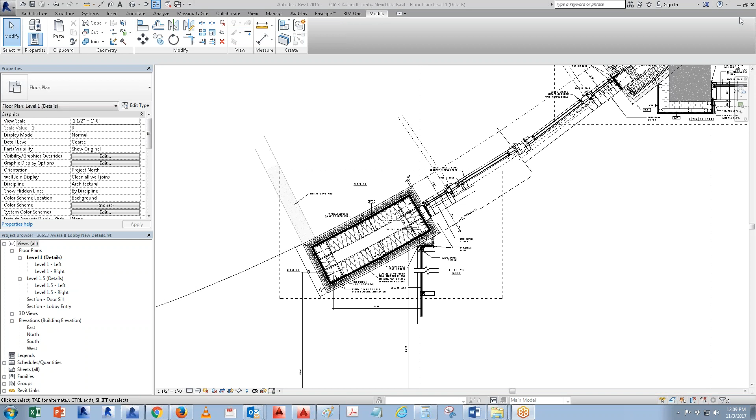Welcome to IBI. Today I'm going to basically talk about the questions you guys have. It's going to be like a live demo where you guys can ask me anything, and I'll try to answer as much as I can. You guys have already gone through the video, right, about how to set up all that stuff? Is there anything you guys have a question with before we start? Nothing? Okay, that's fine.

I'm just going to talk about some stuff, so lunch and learn training. If you guys want access to all the lunch and learn sessions from the past, you can go into the iDrive, and there's one called the CAD, and under there's a lot of lunch and learn and training. A lot of the stuff I've done over like 11 years, I just punch them in there, and you can get all the videos. I do post some of the videos online too. If you want the YouTube videos, just look up my name and you can find it.

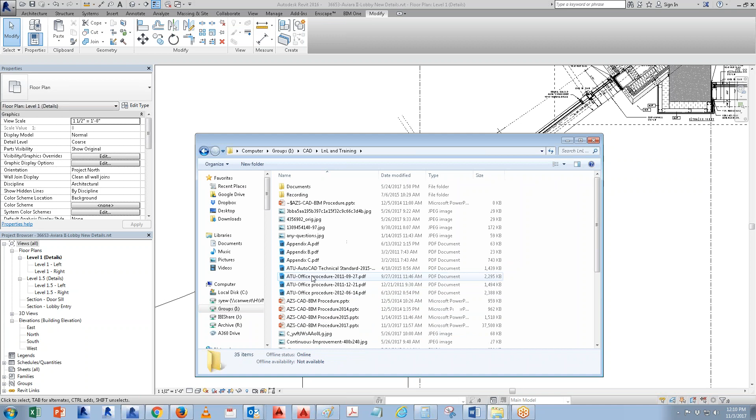So today I'm just going to be going into the office procedure, okay? It should be under this PowerPoint presentation. Welcome to IBI, okay?

Now, if you cannot find those people, there's always that CAD help information you can throw questions up to. But for licensing, let's say if you cannot get an AutoCAD license, those guys are the support. Do not go to IT because all of it deals from this CAD help, because CAD help deals with all licensing, including if you want V-Ray for SketchUp or some specific license for a specific product. Those are the go-to people, okay?

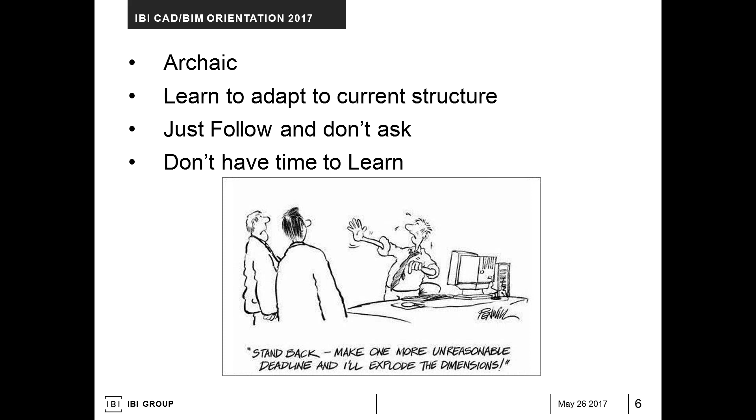Like what happens is sometimes we did a Revit project, and then the upper management says, oh just do it in CAD, finish it, right? And then what happens is the trickle down becomes a much more brutal sequence, because people miss out on the opportunity to teach the upper management about why we should keep this within the Revit side.

The other thing is that the market is adapting, it's changing very rapidly, and how would you adapt? I've met with a lot of offices for the past couple of years, and a lot of them are saying we're changing - Revit is becoming more and more adaptable, and they have to work within that kind of realm.

So when users say I want to basically just do it in CAD because that's what I'm used to, don't think about now - think about the future, 10 years down the road. Some project managers, I feel sorry for them, because I've been telling them they should be getting into Revit, and now they've been put on a job for 4 years and haven't learned any Revit. Later on, when you have new projects, they're going to be getting a Revit project, and how are they going to deal with this? They don't know.

This is why I said adapt to technology. Don't be shy about not learning it, because it's going to be coming down the pipe. You're going to have a lot of projects that's going to be Revit. It's going to be sometimes a bit CAD, but most of the time it's going to be just Revit, so how are you going to be dealing with that?

I just have a quick question. Sure.

So far it's been like Revit is easy to work with once the design is frozen and you're in kind of like a working drawing stage. But it's a bit too chunky and less flexible at a design stage, and we're facing that issue with one of the projects.

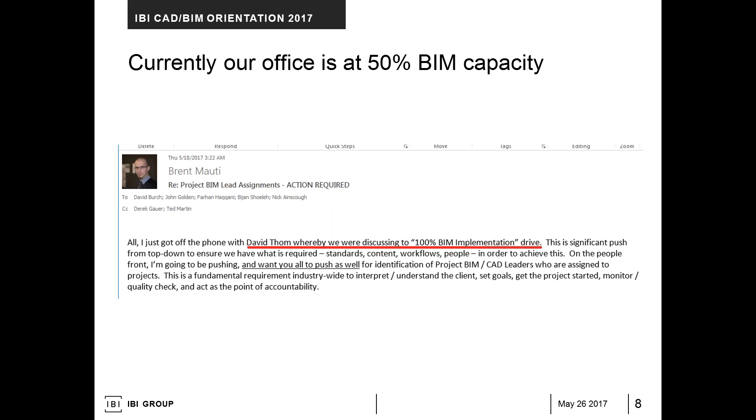Most users, this has always come up, right? They always hate uncertainties, okay? The thing is that if they don't like uncertainties, it's like, why bother pursuing it? But the thing is, I always give that attitude that if you don't try, you're not going to learn, because you can get stuck doing the CAD job over and over and over again.

But the costs keep going up and up and up, and then we have to pay the user more. But our fee to the client always reduces down to almost bare to nothing. So how do you adapt to that, right? As the user cost goes up and fees go down, you kind of have to find that balance.

So this is why a lot of the Revit projects have a benefit, because you're using fewer people, but at the same time, you're training them more to become, let's just say, a builder, right? You know how in the past, in architecture, they always say that the architects are the builders, structural engineer, mechanical, and electrical, or whatever, right?

Wrapped in one. So what Revit is actually doing is going back to that kind of scenario where you are an architect, you are a structural engineer, you are electrical, mechanical, and you're a contractor, all wrapped in one. So the possibility is endless, just depending on how much you want to learn, okay?

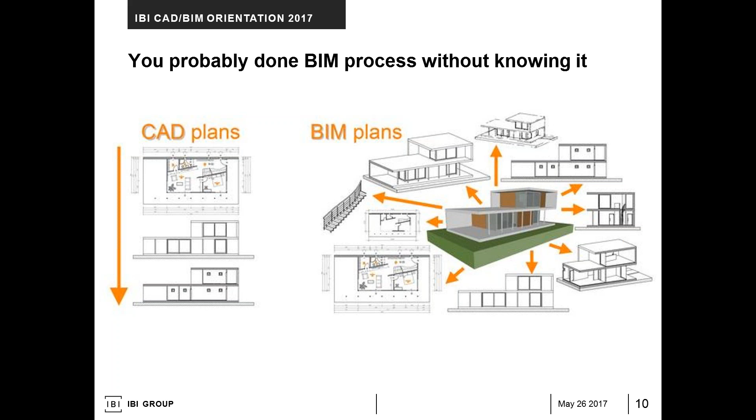Still, a lot of the time when we're doing SketchUp, we're just basically redrawing stuff. Whereas with BIM, if you have a central server hosted either by the city or whoever, like Google, then you could potentially pull that Revit data or whatever data it is and put it on your plan, and you don't have to do anything. That's kind of like the idea, right? Everybody just has this Revit thing, and then, how did this resource get pulled together?

The other thing I always find very fascinating in our office is that everybody works with so many multiple platforms. You go through the process where in a submission, you use so many different programs, and at the end of the day, when you do updating, it's like, where do I go? The thing is that we want to encourage people to simplify their workflow. Just don't think about, oh, I have to do this, I have to do this - just simplify it, make way.

Sometimes, like right now, I don't see the necessity of using SketchUp because I'm very proficient in Revit. So it becomes kind of like a tool, how to use it. Sometimes I use SketchUp because I have to take that SketchUp model and give it to a consultant who wants to use it. So how do you take the Revit data, which is massive, and downgrade it down to SketchUp level? Those are potential workarounds. So don't trash SketchUp out of your workflow, but use it as a way to enhance capability and potentially as a learning tool.

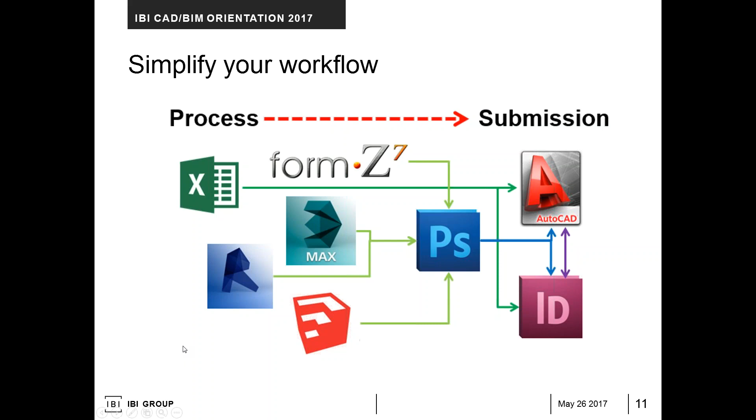Because one thing, everybody has expertise in different programs, but one thing we don't have is that we don't know who's good at what, and they don't teach people, so everybody just does their own thing. We never capture a lot of this user experience, and they don't teach other people, oh, this is how I do it, how I overcome it - everybody just does their own thing. So we want to capture that, but for now, we just say simplify your workflow.

So what I mean by simplify workflow is that if you're using Revit from start to finish, all you have is just one flow, and then this is basically a sub-program that's supporting your Revit side of things. Your data will always update, so basically this is your primary data, and the rest is just supplementary.

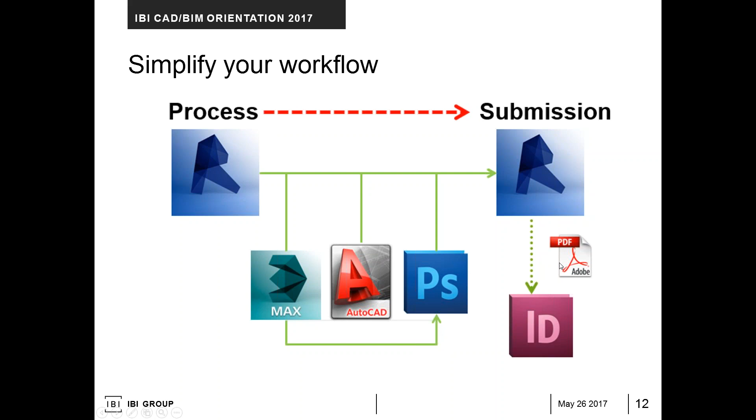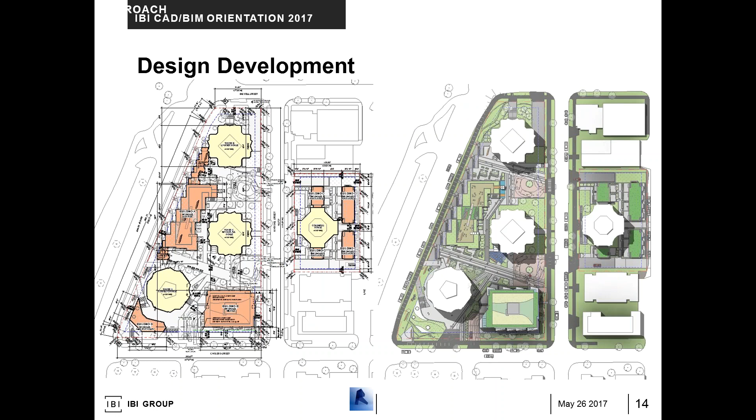All right, now here's some of the projects that we can do. This is design development, all done in Revit, no special tools. Again, this is kind of like Revit - you can design a lot of stuff, just given the context of what you want.

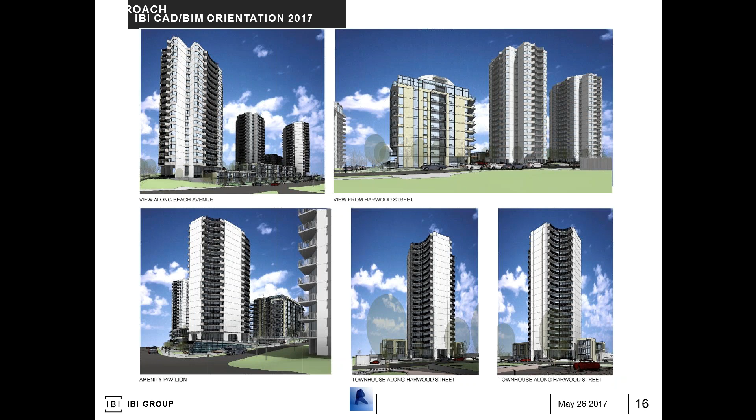Also ask the right question, ask the right people, because that's one thing we always miss in our office - people just trust somebody that doesn't know what they're doing. That's always the case. If you ask the right people, then you can produce your project on a timely manner, on budget, and it will not kill your overall project, and then you have to convert back to CAD. So some of the samples I just illustrated - this one, again, is done in Revit, and there's no other software I'm using.

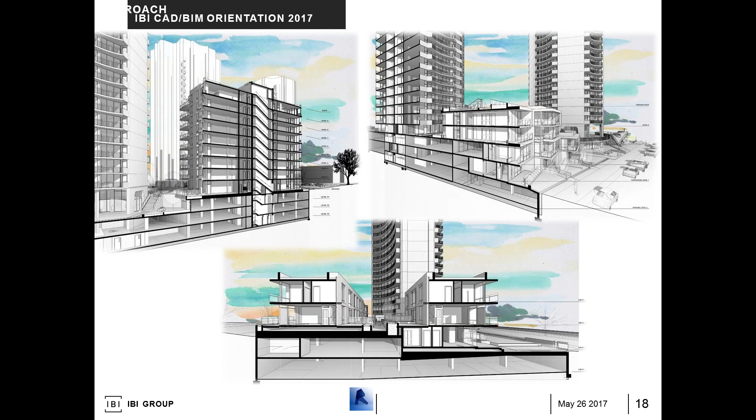What I did in this particular case is I basically slapped a hand-drawn, like watercolor background behind the Revit background. It looks kind of nice, and you can see the level of detail achievable, even for a section. So it's very presentation oriented. It is achievable, it's just a question of whether the user wants to go to that level.

You can also take that and use it for rendering in 3ds Max with V-Ray, and some offices use Enscape. If you don't know what Enscape does, it basically pulls the Revit model and lets you do real-time rendering at the same time, saving a snapshot so you don't have to go to a separate 3D model. All the materials and everything are set in Revit, then pushed to Enscape, and it does the rendering.

Question: do you have a different setup for Revit for conceptual design as opposed to working drawings? We do, but I have to train people on how to use it, because the major issue in our office is that everybody has a different background. They may not have all the expertise from the working drawings side.

I've seen a lot of projects where people copy the working drawing stuff and put it into conceptual design, or vice versa, and it just fails. They need constant mentoring, just teaching them how to do it, like this is the conceptual approach and how I would approach it, et cetera.

That was my question. And when I said our office in Edmonton, they're treating it like a separate project altogether, managing everything themselves. But so far it's part of our collaboration, so our Vancouver office is collaborating with the Edmonton office.

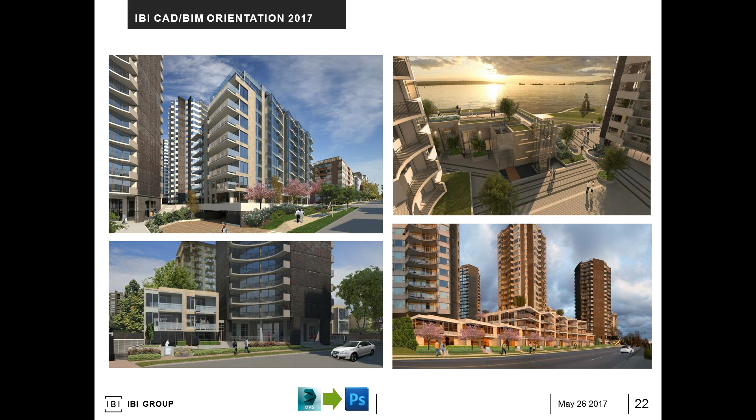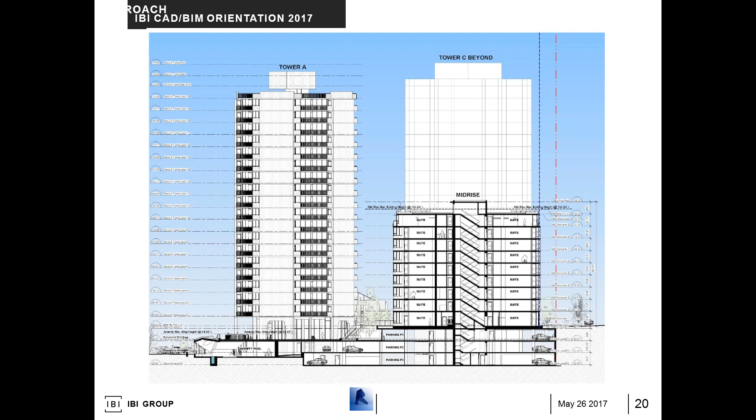Like this project I'm working on right now is actually a DP, and we treat it as a DP and then it goes into working drawings. It's a huge advantage because you just develop the same model and build more on it for working drawings, right? It is a big advantage, everyone agrees.

But so far has our office used it in such a way for any project like that? Well, in every office I've been in, it's a constant battle. It's like, when do you bring in Revit? Yeah, and in some offices, even a previous office, we did the conceptual design in Revit, but the working drawing team, the technical drawing team, threw that model out the window.

They prefer to build it in their own way, and it defeats the purpose of having Revit.

This is why it all comes down to, some people like to become a designer and they do not learn the working drawing side of things. For me, I like to do everything, because this is how you learn to become the master builder. If you're not going to learn the whole process, you're not going to understand how things are put together.

That's where I find there are a lot of challenges in our office, some people are willing to learn, some people are not willing to learn. We have a mixed bag of everybody, right? So at the same time, I want to be receptive and try to educate them as much as I can, because you may have experience that they may not have.

At the same time, just mentor them, because that's one thing I always find people just don't do anymore. It was like a master-apprentice relationship in the past, where you take on an apprentice and teach them how carpentry used to be done, passing down that knowledge so they can pass it to the next person. With Revit, we have to treat it the same way.

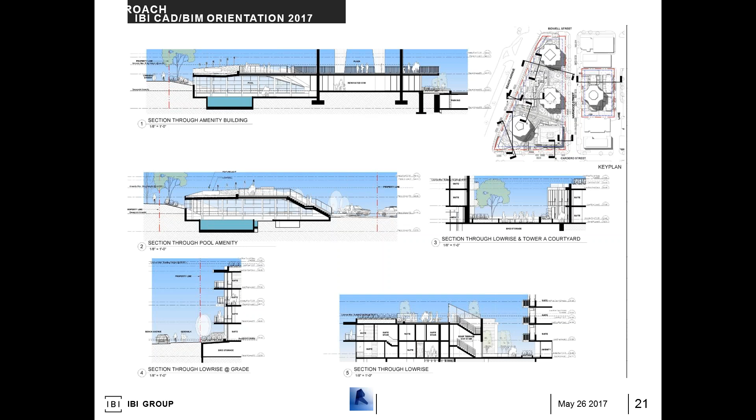They don't know everything, but they're put into a role where they have to do everything, and it becomes a telltale sign. I've written lists and given them to the managers saying, you guys have to be more upfront with this, and if you don't know Revit, that's okay—it's an opportunity to learn.

All right, now you've probably seen this. This is kind of conceptual—you can do it inside Revit. It's just simple stuff, and then all the filters, everything, I put as a background. It's all done within Revit. There's nothing—you don't need Photoshop, nothing. Whenever the model changes, everything changes. So that's the advantage of it.

Yeah, all this background, all of this, it's all within Revit. What I do is apply filters like texture mapping and all that stuff, and then just marry them together.

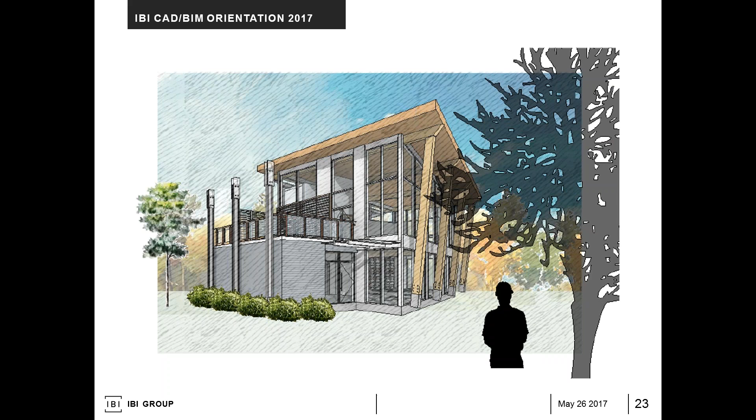Any questions so far?

Some tools useful to me—some questions people always ask in AutoCAD is, why do you disable Ref Edit? We disable it for a reason. What I found in the past is that people ref edit and don't clean their drawings, and what tends to happen is all the junk drawings get into the files and corrupt everybody's work. It was a daunting task to clean it out, so I decided to disable it.

Also, I do a lot of dynamic blocks. What dynamic blocks do is let you treat a block and stretch it multiple ways, similar to how Revit does it with families. If you want to approach it more like a BIM environment, you have to think of dynamic blocks like a family—you just put it in there, say what size you want, and plug it in.

So that's why I disabled Ref Edit, because Ref Edit would destroy dynamic blocks. That's the reason behind it. If not, fine, you can use it, as long as the user cleans it out. But try not to use Ref Edit as much as possible, because there's so many things that could go wrong, will go wrong. The user might say it's easier for me, but think of the consequences of all the stuff you could do wrong.

On one project in particular, someone ref-edited the dynamic blocks for a door. What happened is that when they saved it, the next time people wanted to change the door size, they could no longer do it, because people ref-edit stuff. To fix it, you have to replace all the doors in the drawings. That wasted so much time—simple stuff like that could mess up the whole project.

Okay, any questions so far? Kind of short, but okay.

Should I show you guys how we set up a template within AutoCAD so that you guys have all the information? Okay, so let's say I'm going to open up AutoCAD, let me close that.

When you first start over with AutoCAD, when you click on new, it's going to ask you what kind of template you're going to use. The first template is either ACAD ISO or ACAD. ACAD basically means it's an imperial template, ISO means it's a metric template. But if you don't know what you want, click on this little button right there and say open with template, or open with no template, metric or imperial. Click on that, there you go.

It's fine. The next thing you want to do is that when you click on this, you see that you only get one scale added to this.

Oh, before I do anything, I forgot to ask, how many of you guys have this IBI Group drop-down menu installed on their machine? If you don't have it, I can demonstrate how to load that quickly.

Okay, if you don't have it, let me know. I could do a demonstration on that.

But since everybody says they have it, the next thing you want to do is add your scale. You see there's the IBI group annotated scale. But if you want all the scales, not just one, let's say this is imperial - when I put in, let's say, 1/2 inch, it's going to add 1/2 inch to the scale.

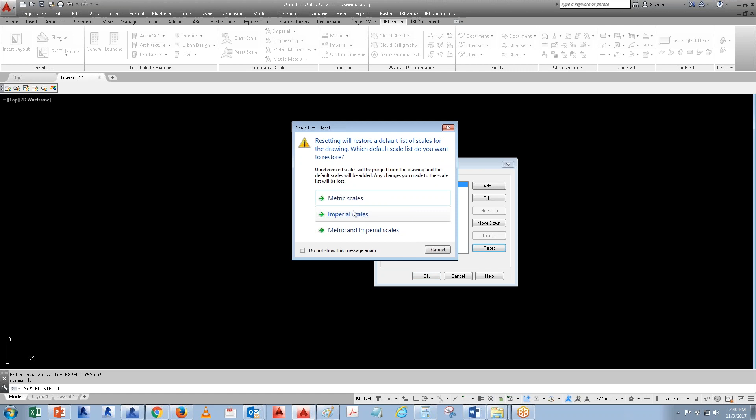But in this kind of case, if you're using one scale, just choose imperial. What happens is that it's going to load in all the scales. By the end of the day, whatever scale is not used, it's going to get deleted, so just don't worry about it. You can keep resetting back just to get those scales.

The next thing you want to do is, this is where the content is supposed to be. So what you do is go through the architecture - we have imperial standard, documentation, and design. Standard means if you want to add layers, text, dimensions, all those standards. Documentation is basically all the bubbles, all the stuff in there. And design is basically all doors, walls, stuff you're going to be using for architecture.

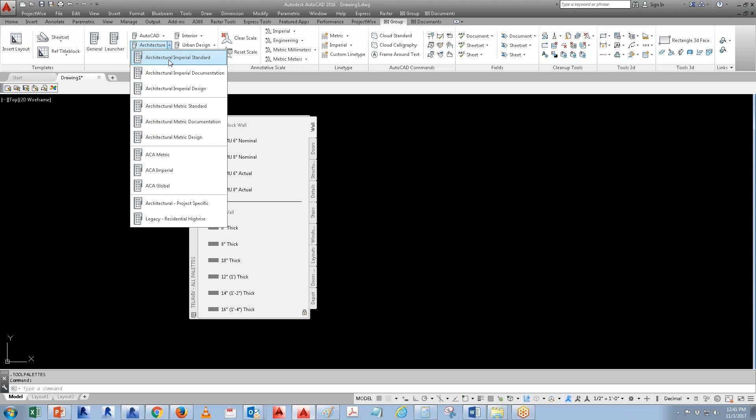Now what happens is when you click on, let's say, imperial standard, you have layers, and when you click on text, let's say you're using 3/32 equivalent to 2.5 millimeters, you click on that, and it reacts to the scale that you put in. Okay, let's say test or whatever.

Now, once you change the scale to, let's say, I want it to be 1/4 inch - okay, I'm going to zoom out - we put the same text. See, it becomes bigger.

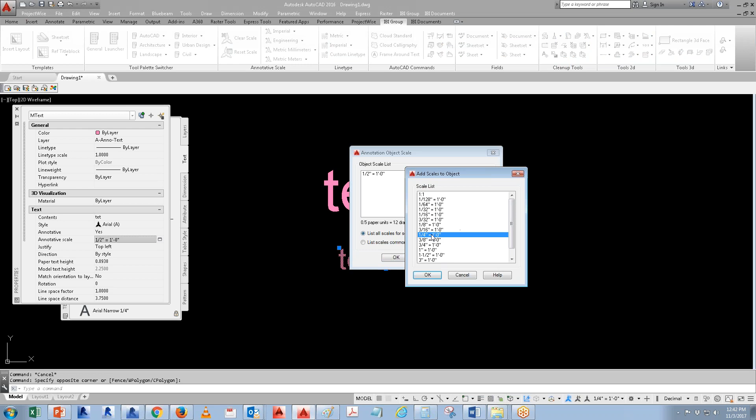So what you have to do is go in there, click on this, and add that scale. So you could use multiple scales for just one drawing, so you don't have to repeat the information. You can have one scale that's 1/4 inch, and then one scale for 1/2 inch, and basically it covers both sides of things.

In the past, what people tend to do - let's see, where's my 1/2 inch? Oh, right there. What people did in the past is usually have two texts for two different scales, one is 1/8, one is 1/4 inch. That's double the information - that's how we used to do it. We'd put it on a layer and then freeze it for this scale and freeze it for that scale. That eliminates pretty much all that stuff.

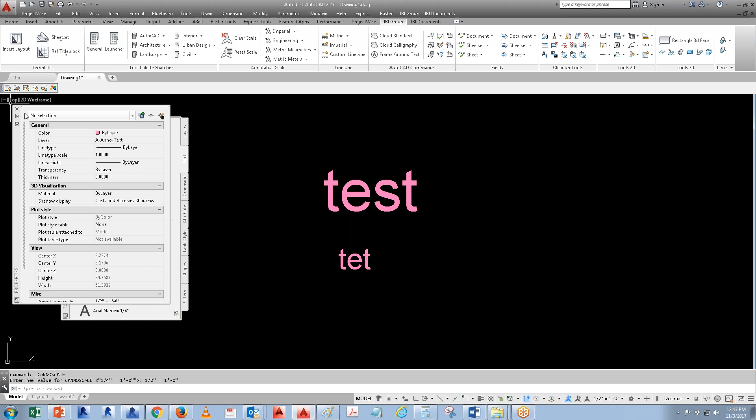As long as you understand the concept of this, you're fine. Any questions so far with this? Pretty easy, right? Okay, the next step I want to showcase is adding templates.

Where's your template for your layout? Now, if you're trying to plan for a plan - here, let me back up, come on, I'd like to move this right there. Let's say you're working on a project and you're not sure what size it is, and the client has this particular project.

Let's say this is just a project, and you get a building like this, and you want to plan out the size of the page. The first thing I would do is always add two scales - one is 1/4 inch, the other is 1/8, which is equivalent to 1 to 50 and 1 to 100.

So the first thing I would do is add that scale, 1/4 inch and 1/8. The next thing you want to do is figure out what paper size you want on the sheet.

This is model space, okay? You want to figure out what size it is. Let me double check if this is the correct size. Sorry, when I did the demo, I didn't scale the drawings, unfortunately. Let me double check. Oh okay, so this is actually converted from PDF to DWG. That's fine, I'll scale this up so you understand the concept.

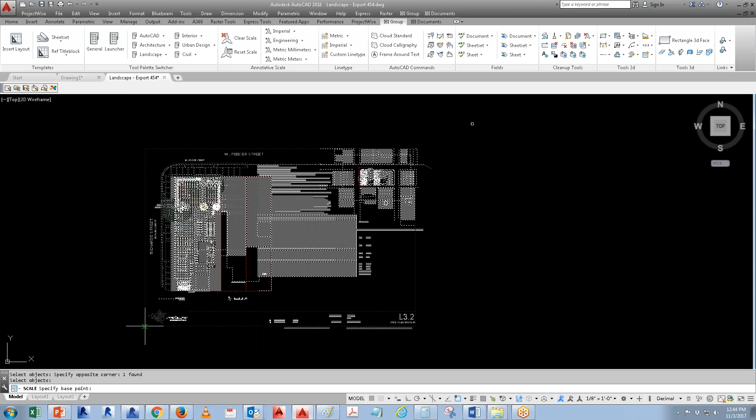Okay, I'm going to blow it up to 100 times. So what you want is to figure out what's the paper size. This is where this thing comes in, reference title block, okay? So what this does is when you put it in, it will react to the scale right there. I'm going to basically put it in there, okay.

What it does is it plans out that this paper size may be too big for 1/8. If you want, you can say, I want to size it down to Arch E1, okay, let's say this one, that looks a little bit better.

But if you're doing like DP phase, sometimes you want to figure out, keep it within Arch D, right? So what this does is plan out and see if we can get it down to a smaller page size before you attempt to do your project.

Because one thing I always find a lot of users don't do is they just put in a template and then just go with Arch E, but they're showing too much stuff. So always plan out stuff. Let's say this is your building, and you have a tool that tells you kind of what you expect from a page size, and then you select a template, what you want to choose, and then you say, that's the paper size I want.

So for this case, I would say let's go ANSI, okay? ANSI is American Standard, if you know. Half size of ANSI is 11x17, if you don't know that, right, 50%. So if you want to plan it out, I always do that. It's either you do Arch D, like for DP side, or you do ANSI. If you can get it down to ANSI, that's great because 50% is 11x17.

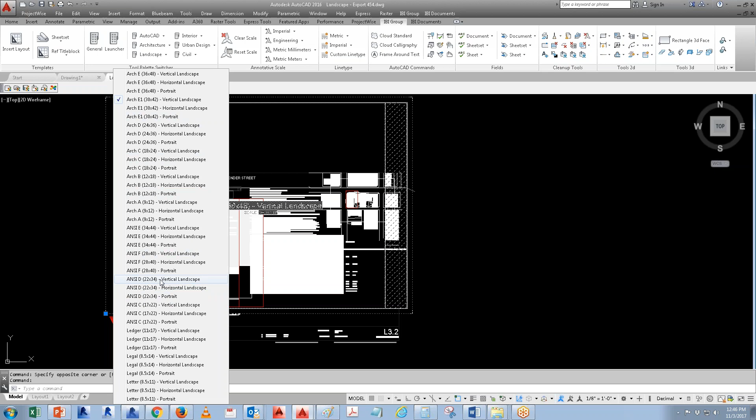So you're killing two birds with one stone, okay? Sometimes clients like that, and what happens is they provide a lot of the booklets, and then when you have an ANSI D with vertical, you can just plot this out as 11x17, and then everything works. Okay, so this one, ANSI D does work.

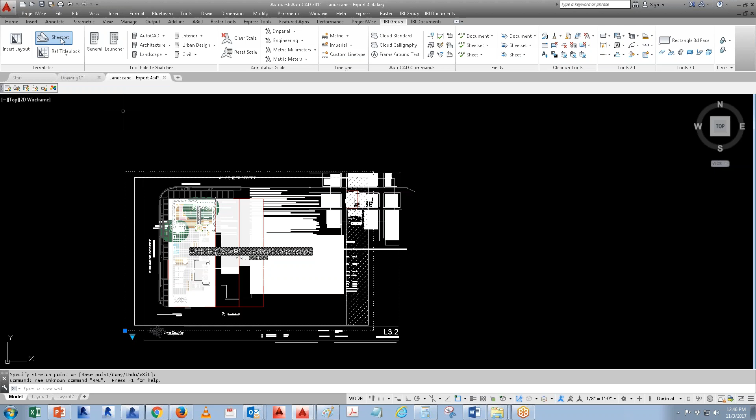Okay, the next step is once you have this thing established, let's say this is good, I want this at 1/8. Next thing you want to do is select the sheet set now. Okay, if you're a sheet set, click on this.

Now what it does is there's a lot of templates in there, so you want to pick the one you want. So you go to architecture. It asks you, okay, what kind of stage you want. Sorry, this is small for people. You have stage 1, stage 2, stage 3, or stage all.

So what it means is stage 1 is only conceptual design, when you're doing like very, very early on, design development, and then working drawings, or you want to go all out, basically stage from the beginning till the end. For now, I'm just going to say I'm going to go design development, and it asks you number of levels of folders.

So what this means is think of it as an XREF, right? How many XREF it gets before it goes into a sheet. So when you go level 1, it means you only got element, which is your XREF, and it goes into the sheet. So you have one level of reference.

There is one called the no subfolder. What it means is when you go to element, you see that there's a subfolder. So when you go into this element, it has no subfolder. When would you use this?

With subfolder, if your drawings have like over hundreds and hundreds of XREF, then it's a good idea to put it with the subfolder. If you are working in like, let's say, demolition, and you only got like 5 or 6 XREF, having no subfolder makes perfect sense because you can just have all that drawings in just one basket rather than splitting them up based on very, very little.

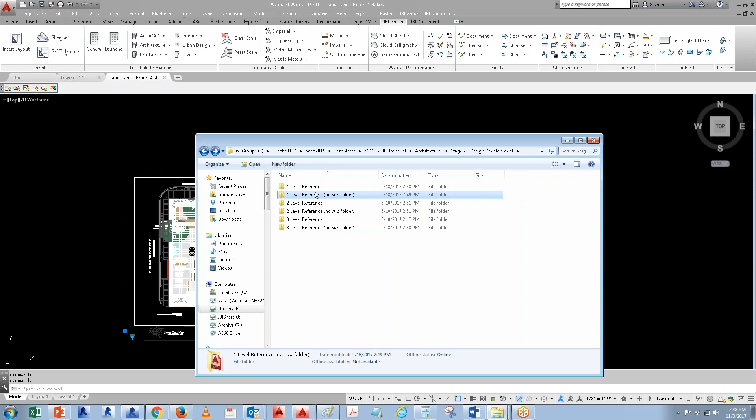If you're not sure, you always come and ask me. I'll explain to you exactly what a lot of this stuff means.

Let's say for this one, I'm just going to use two-level reference. So what happens is you have elements, it goes to the views, then goes to the sheet. I think in one of the documentation it shows you kind of like the puzzle pieces, not sure if you've seen that, but that's the idea of it.

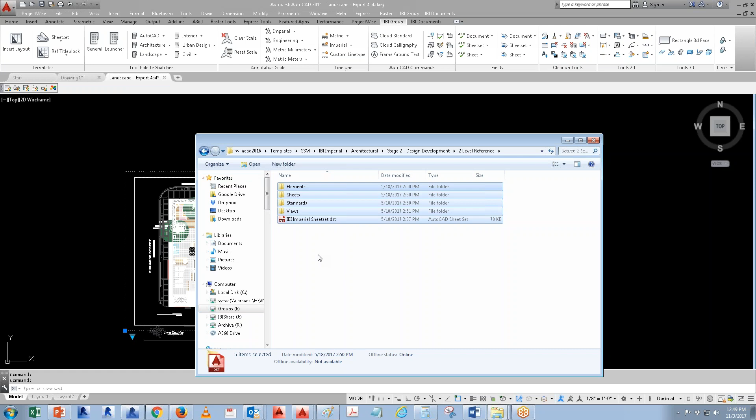What you do is take this, and I'm just going to make a copy of that, and you can dump it in anywhere you want, let's say on desktop. For this one, I'm just going to put it in J drive under user clean weekly.

Now if you guys want to share stuff, I'm not sure if you know the user folder. If you don't know what it does, if you want to share it with anybody, just put it in there because it gets deleted every week. It's just kind of a temporary stuff.

So sometimes I send people, let's say you need a patch and IT says can you download the patch, because some patches require my login to access it. So I would download that patch and put it on the server for Adrian or whoever, then they could just go to that folder and have access to it. If you don't delete it, that's fine, it self-purges. So if you're one of those people who likes to leave things there, just dump it there.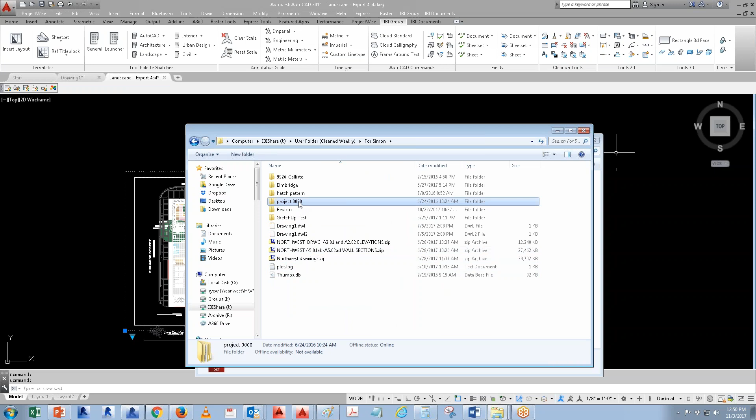So under Simon, what I have is a project 0000 — okay, let me get rid of that. What you're going to do, try again... okay, I'm not going to bother with that. What you do is just copy that template, rename it, call it like 0000 project, could be anything. And what you have to do is just double click on this.

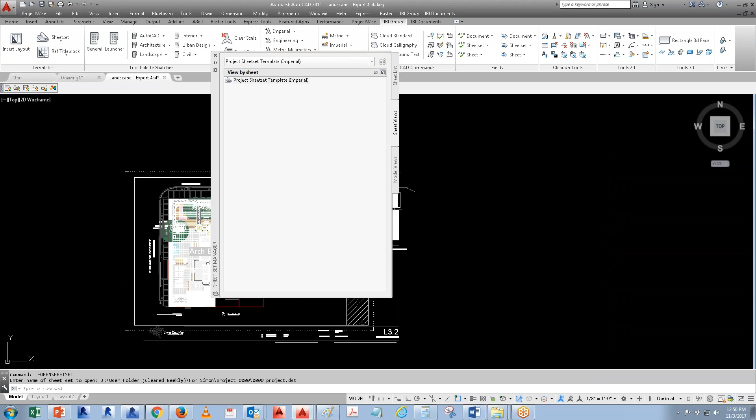And what the user can do is start a new sheet, A000, and then cover sheet. When you double click on this, you notice it basically comes up with this kind of page setup. Simple as that.

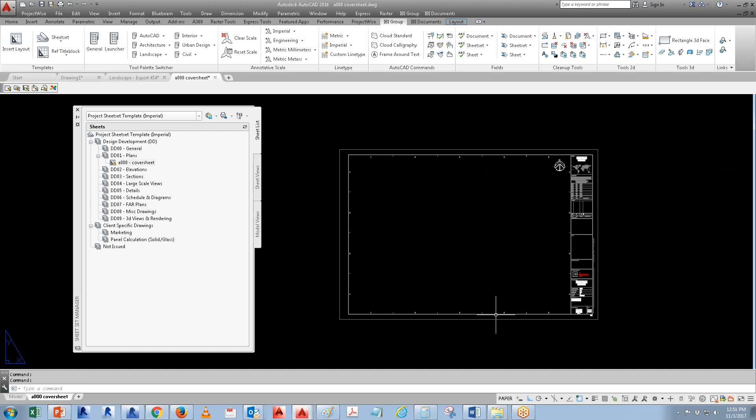Now, if you want to change a lot of the stuff — the reason why I put in this globe, that's a placeholder for your client's logo.

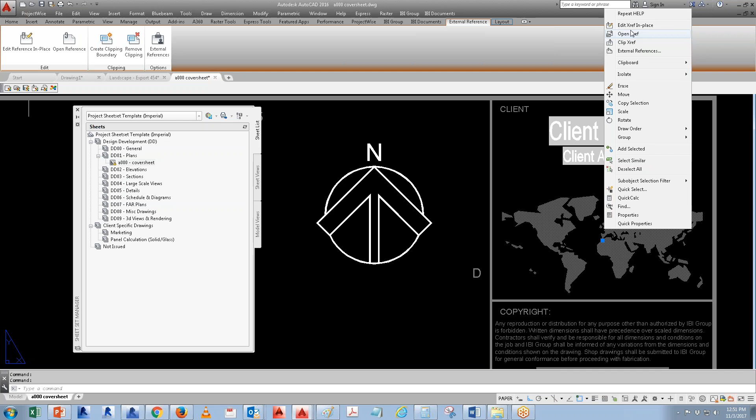So if you're working with somebody, I'm going to open up Xref. The reason why I put in Xref is because when you change the sheet, all the client logos is going to be where it is. Later I'm going to show you how to change the sheet very easily inside Revit — oh, inside AutoCAD, sorry. All right, so you go open it.

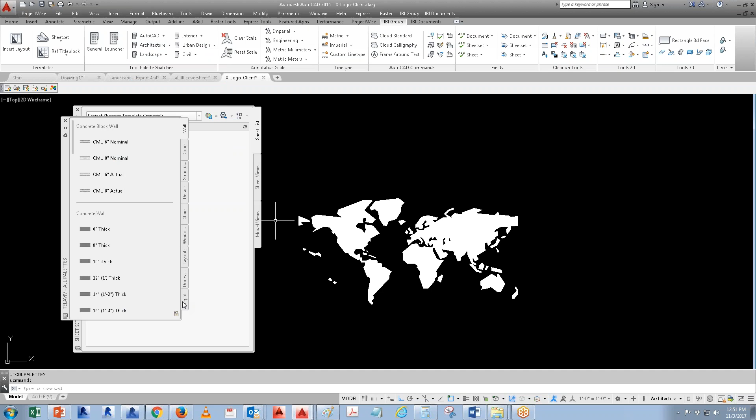Okay, you have the globe. You go to the IBI group, then the architecture, then design, and there's one called the depot, and under the depot there's logo and symbols. So if you have a client logo, this is why I recommend just send it to me, I'll put it there. Let's say you're using Fraser Health for instance, just copy that and paste it there. Just place it relatively there, and then erase it.

And when you save it, this is going to save into that project template. So next time — I'm just going to say no. I'm going to close out of that.

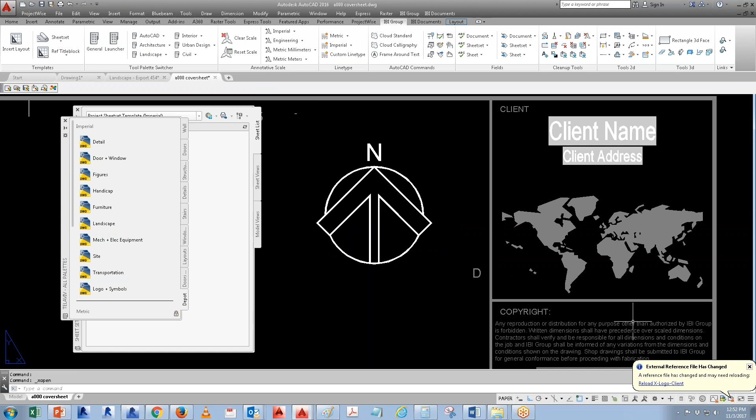And there you go, there's your Fraser Health.

Now if you want to remove this, let's say it's a client name, it's very simple. All you have to do is right click, go to Properties, and scroll all the way down until you find the client name and address.

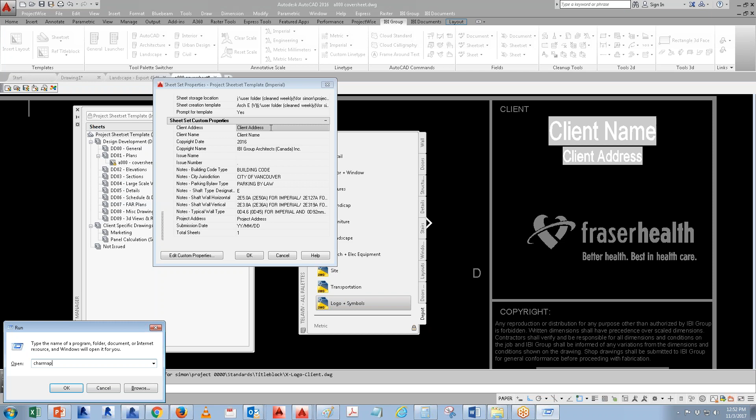You could put a space, but I don't recommend it. What I typically do is press Windows button and R, and call up the character map, C-H-A-R-M-A-P. What character map does is give you a representation of whatever symbols you have inside this font, and you can paste it in and it becomes permanent.

So I'm going to scroll all the way down until I find a blank spot. Let's see, where's my good blank spot. You have so many symbols that you can use. Oh, this is a good blank spot.

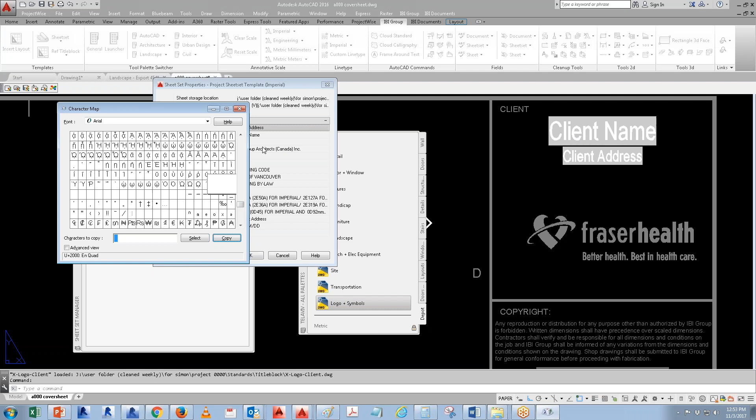So you select that, copy it, because if you use the normal space button, what tends to happen is that it returns as dash, dash, dash, dash, dash - you don't want to see that. But if I put it as a fake version of space, let's say client address and client name, and hit OK, and regenerate...

That's the result you get. Don't worry about the grey, because when you print it out, it's not going to show - this is just a trick. I'm explaining this because some people go in there and just remove it, and what happens is that's a waste of time. Why don't you just ask me earlier, right?

So those are basically the questions. I want to educate people because there are a lot of tricks you can use. Now what if you made a mistake and say, oh, I no longer need this page, I want a bigger page? There's a way you can change it. I'll show you how to change it pretty quickly.

The first thing you want to do to change the page size is right-click here, go to Properties, scroll all the way down until you find this little guy here, Sheet Creation Template. By default it's Arch E, but if you want to change it to something else, click on this and pick whatever template you want to put in there.

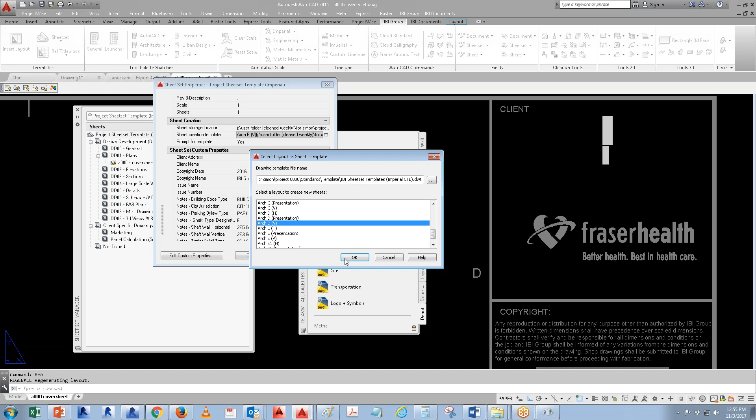So let's say, for example, I'm going to go Arch D, vertical. Okay, so what you do is click on this and hit OK, and it asks if you want to apply it. I normally say yes.

Now if you have a certain requirement where you want 11 by 17, there's a folder specifically for that - you could say I want this to be 11 by 17 right here. Each subfolder has its own control for different page sizes; this is the global control. So you can have a details subfolder set to 11 by 17. This is how you control what page size you want.

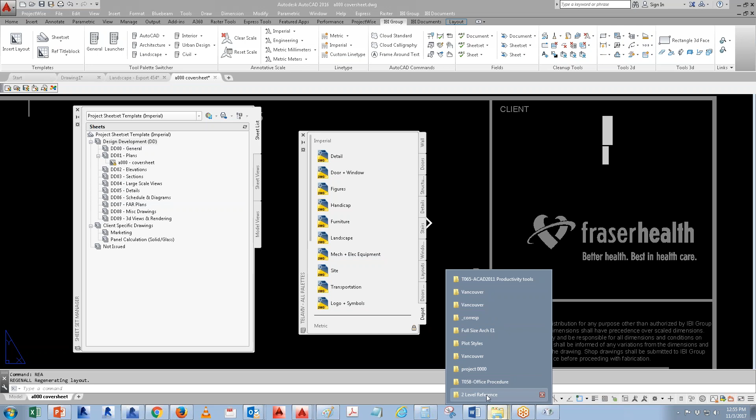And the nicest thing about this is that it's always going to put it in the correct location. Let's see, where is it... okay, I copied that. I'm going to close that out. And what happened is you see that drawing? Cover page, it's right there. So it's going to basically put it in the right location.

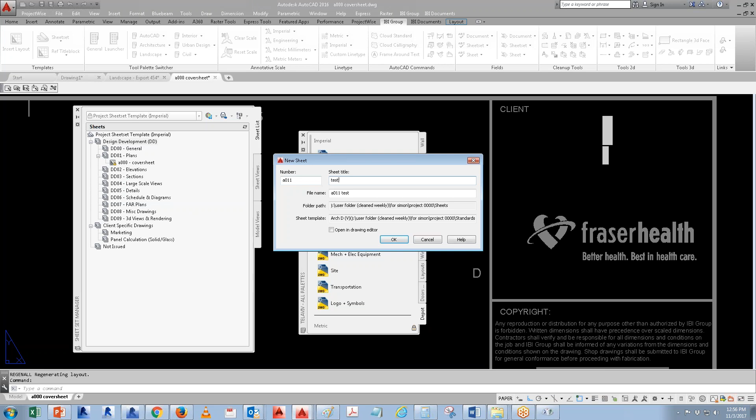As long as the user follows exactly, that's fine. But just be careful - do not create a new sheet on the outside. Let's say I'm putting it like that, and next thing you know you're going to get a blank. It doesn't know where to go. Sometimes I've seen people just do this and go new sheet, let's say a whatever, and then test.

There's an issue with that - don't do that. The reason why is that when you double click, that's what you get. You know where it's placing it? It is placing it outside of your drawing. So basically it's placing this sheet right there. And you have to know that this template is basically a relative path - all the xref is relative. Every time you create a new sheet, make sure it goes into that subfolder, or else you're going to get this mumbo jumbo mess.

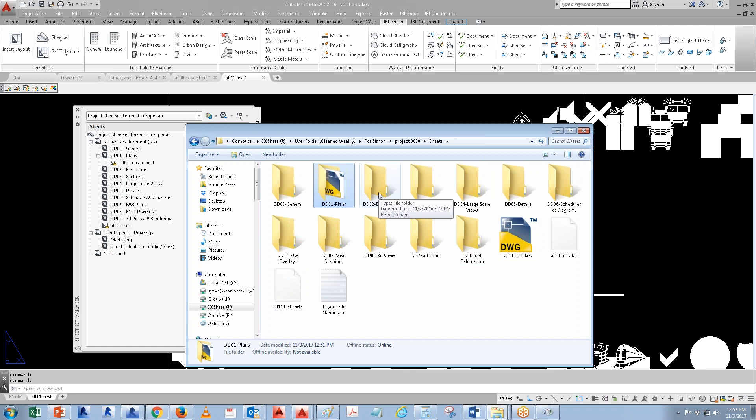It's because they did it wrong. Just be aware, because people will create crap that they may not understand and don't ask the question. I can understand, but as long as you don't create outside of that subfolder, you're good, because I already configured this pretty well. As long as people follow this, you should be okay - 90% of the time it will resolve your issue.

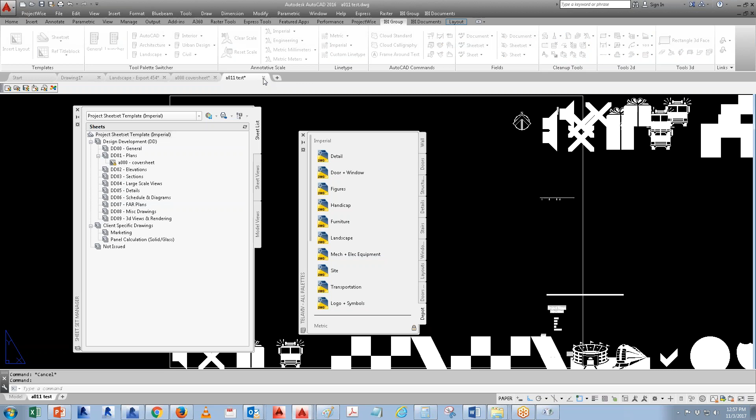I'm going to remove that. Let's say, for example, you want to change sheets. So the first thing I want to do is, let's say, for example, this cover page - I want to change the sheet.

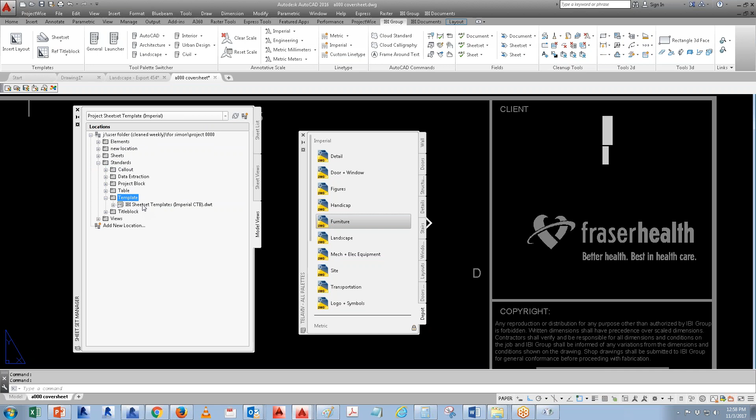When I change the sheet here, it will not change any sheet that you have created previously. It's only for the new sheet. Whenever you create a new sheet, it will create it. For existing sheets, you have to go through model, expand on that, go to standard. There is one called a template, and I want you to open that. What this does is that it has all the sheets within your project. You go in there, select whatever you want. Let's say, for example, I want the Arch DV.

Let's assume that I don't want that. I want like an H. You could copy all that information. Just select it, copy with the base point. I have a pull down. If you want, there's another one, it's like copy with the ribbons. I don't know, I can't find it. But if you know it, just use that.

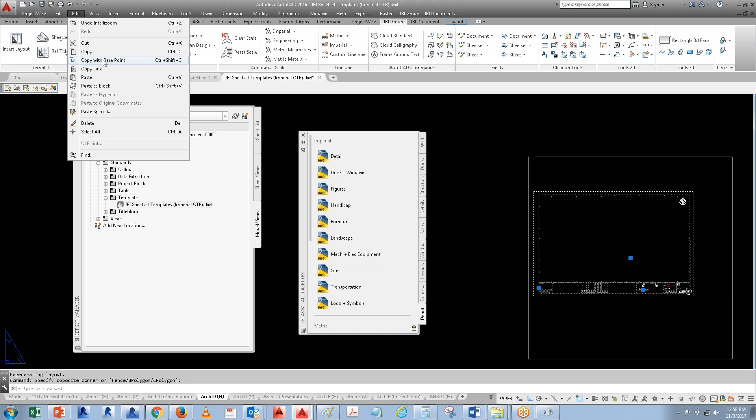So what I would do is I just use the shortcut, Control Shift and C. You can do copy paste, that's fine, but just be careful if you want to be at that 0,0 point, just make sure that. So let's say copy base point and say I'm gonna go 0,0. And what you're gonna do here is get rid of all this, just delete it, and go edit, paste to original coordinates.

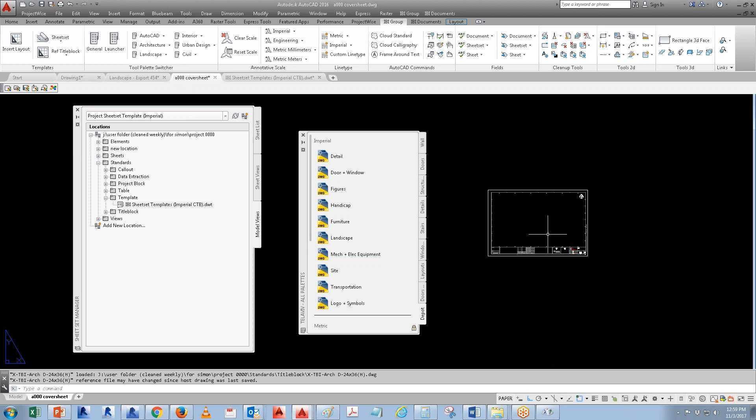There we go. And the nicest thing about Sheet Set Manager is that when you regenerate, all that project information gets transferred over. So that's the benefit of it.

So do not overwrite this. I know some users just have that itchy hand that they want to modify this. You have to think about the whole project. Sometimes what happens is that you will work with ProjectWise. I'm not sure if you guys deal with ProjectWise. ProjectWise is basically taking thousands of AutoCAD drawings, it has similar function to Sheet Set Manager, except that it's going to be done externally.

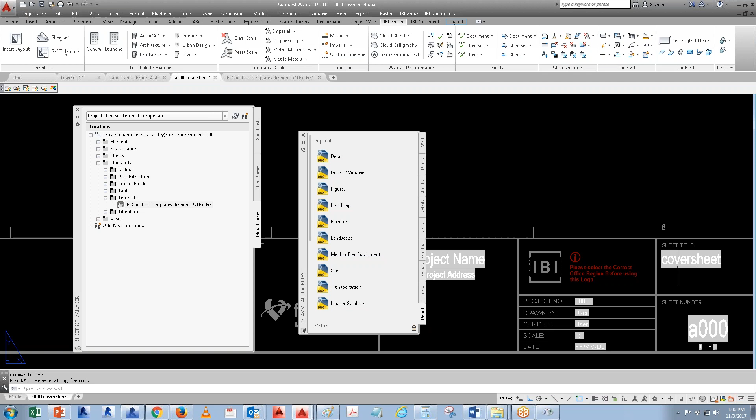And within that Sheet Set Manager, it controls all this field. Think of that as kind of like a stepping stone. You're not supposed to modify those values. Some users can do this, like say, oh, I'm going to go in and modify that value. The problem with this is that next time when there is an issue, people want to replace the sheet with another sheet, that information is stuck in there and you cannot override it. So you kind of have to make sure you go into this information and modify all the information in here, make sure people does that.

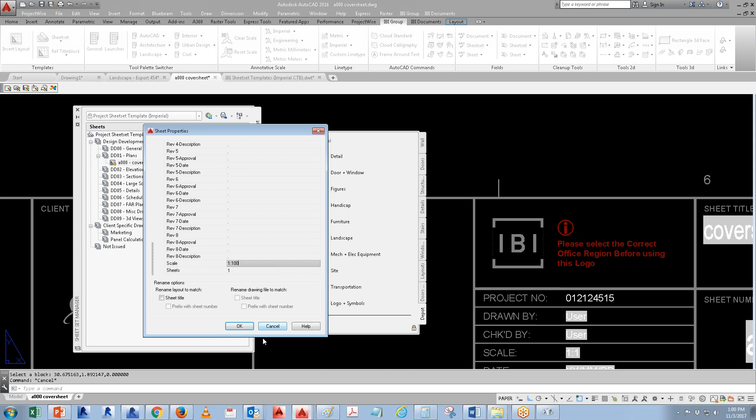Let's say this is 1 to 100, this is very, very common. I've seen people do things, they don't ask. They destroy it, and the next time I have to go back and refill those information. Now I also made a LISP routine to recover that. You see that 1 to 100 change, if someone actually made a mistake like this, there's always a way to recover it. So this is where this field becomes important.

So what I would do is that sheet set, that's a project number, and then it goes back to normal. Just be careful, because I create that specifically for that, because users will modify that stuff. They never ask me. They assume that's what project meant, that's how we do it in AutoCAD, but just be careful. Just use the Sheet Set Manager.

Because when you go to Revit side, it's the same idea. We want to train those people so that when you transition from AutoCAD to Revit, it's very similar. Any questions so far? I think I'm gonna go over time for that. You guys need any kind of educating on any specific part of the workflow or stuff like that?

No? Well, one thing I always want to mention before you guys go, this is very important.

That's too high. When you print any AutoCAD with a wipeout or OLE objects, like an Excel object, it will quit or not print at all. It will give you black, blotchy stuff, or it just won't print. So I typically recommend setting the print quality down to 300 DPI.

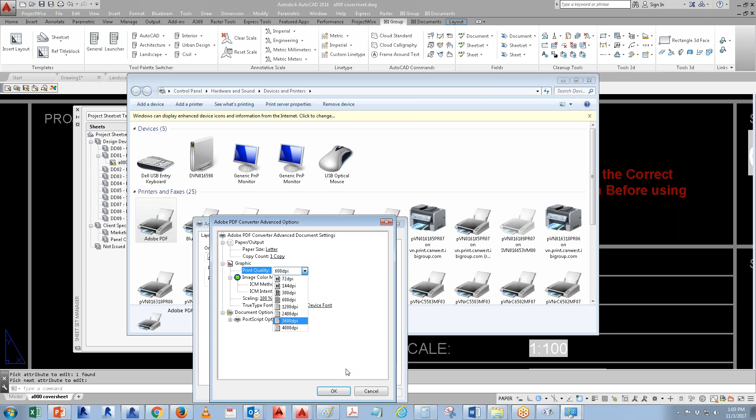Whenever you get a new computer, always configure it, because it's only for you—nobody else has it. This is not global; it's manual configuration, like how Adobe installs on your machine. But if you don't want to use Adobe within AutoCAD, I typically recommend just using the AutoCAD PDF. It's fine if you don't know the configuration.

Users never ask about this setting. They just say, why am I printing so slow? It's that reason.

The other thing I should mention is that some people like to print in-house. Just be careful—we have so many vendors we use. When you're doing in-house printing, keep it limited. If you're printing a check set, just print a check set. Don't print a whole 10-set, 70-page job in-house.

Accounting ends up asking, is this chargeable or not? How should I charge it? Because with a mixed bag of color, it's more work for them. So you have to think about other people—don't just assume it's easy for you.

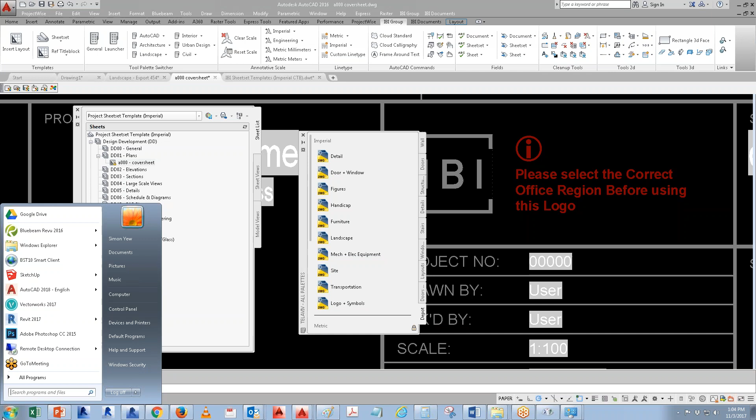So for in-house printing with that device, one thing to keep in mind is that if you want the best quality from your printer, there's a specific kit—this one right here, 870, K870, PL07. If you don't know what it means: PL stands for plotter, PR for printer, MF for multifunctional.

Sometimes people send 11x17 into the plotter and end up with a big chunk of wasted paper they have to crop. Be careful—this has happened before. Someone printed 100 pages on that big plotter, and you're not charged for 8.5 inches, you're charged for the overall length, like 36 by 8.5.

Be careful. When you click on this, there's a property I want people to configure—just use the custom size. Go to properties... there's a custom properties setting there.

When you send a job to the printer, if you want the best quality, I always change this from photo to line quality—actually, the first thing I say is set it to CAD. For color mode, you can choose black and white or color, that's fine.

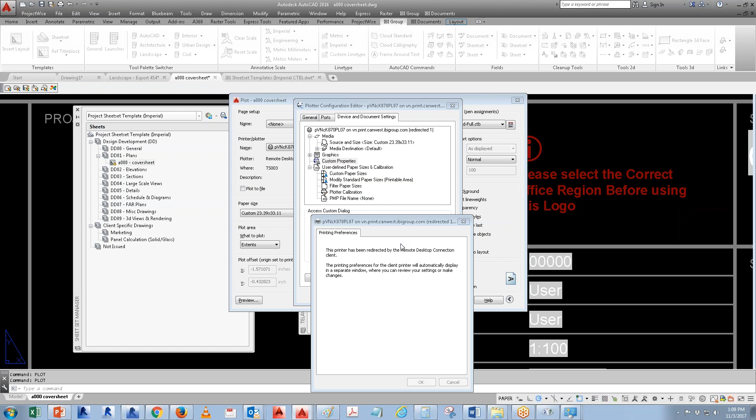Again, don't use this as a massive printer, right? Because we get calls saying 'can you approve this, why is this happening' from people. We have vendors with very competitive pricing. So if you send it to them, they will tell you how much they charge.

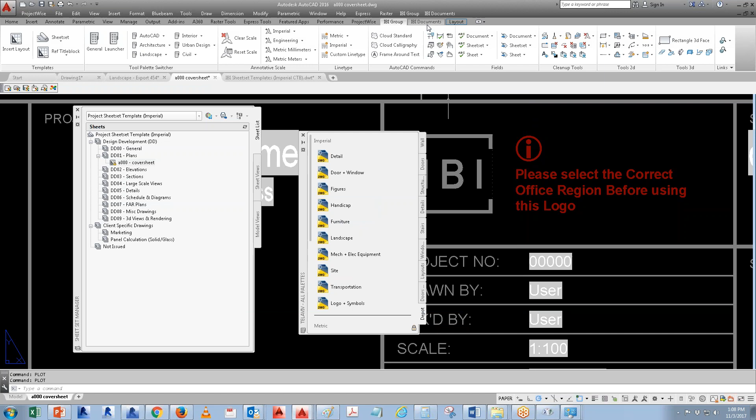So what I have is this IBI document. You can look at it, and there's one called the reprographic price, you just click on this. Just go to CanWest - we're in Canada West, Vancouver. We have all this in-house printing. Typically, in-house printing is going to cost more than outside.

If you want the fastest speed with color, with no rush job charge, I would recommend Resolution because they do the best. Just click on it, and this is how they handle requests. But this document is kind of old, so a lot of it is now digital.

What you do is go to Google and just search Resolution Repro Graphics, right? And then you go up there and put in your request.

But before you do anything, always check with the client who their preferred vendor is, because they may have an account with them. If you go with a certain vendor they don't have an account with, we may have to cover that cost ourselves. Just be careful. Always ask, because it's something people forget to ask.

Say, who should we use? Well, it depends on the client. If you're working with anybody upstairs, say on healthcare or educational projects, they will prefer the cheapest, fastest option without any overtime, late fees, or rush fees. Typically I use Resolution for that because they basically cover all that for free. They're the cheapest, the most efficient, and they print high volume color for pennies.